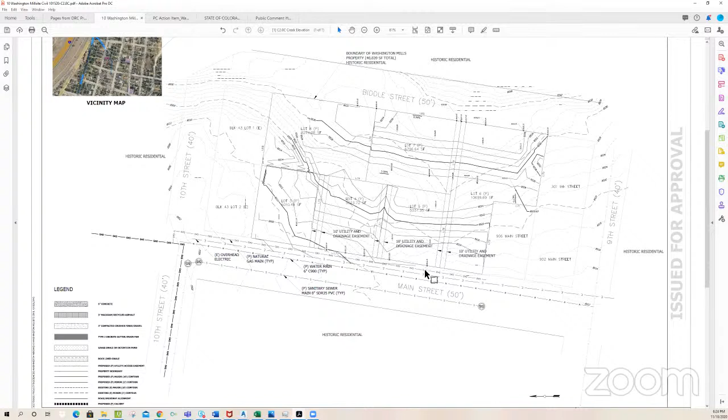You can see we've worked to direct drainage from these upper 3 lots to drainage and utility easements adjacent to lots 3, 4, and 5 along Main Street. This gives us access for water, sewer, electric, gas, and phone utility services, as well as an opportunity to properly drain those upper lots across and down to Main Street, where they currently all drain anyway.

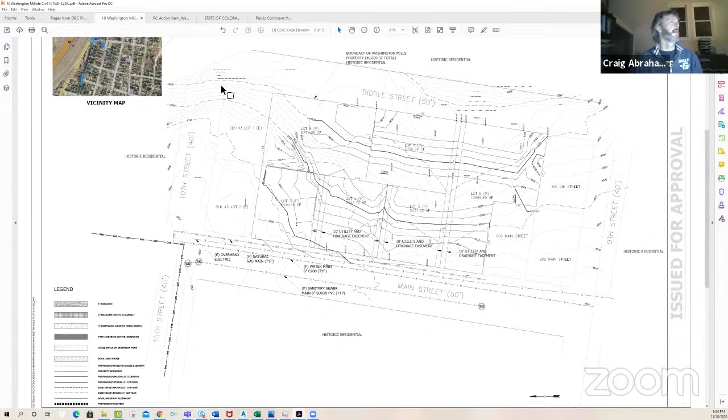We'll zoom in a little bit here to Lot 8, because everybody wants to talk about Lot 8.

So this is the CGS report, or letter I should say, which talks about the apparent tailings on Lot 8. Those tailings exist generally in this area and then in this area as well. The intent would be to construct the residence on the south end of Lot 8 — that would be the building site. We haven't gone out and done a bunch of measurements yet, but that would certainly include an area that has potentially been identified with those tailings.

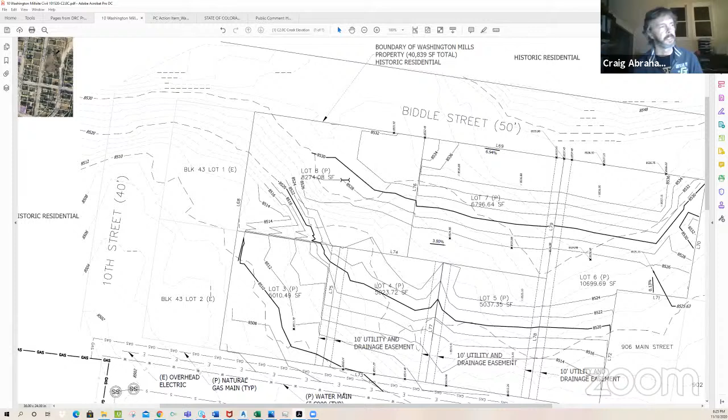We have acted on the request from CGS with regard to soil sampling. Those soil samples were collected last week, and we expect to have the results and perspective from our environmental consultant by the end of this week. Certainly we'll be moving forward next week to begin formulating a plan to address any concerns identified in those sampling results, and then have those as part of our preliminary plat package for Planning Commission.

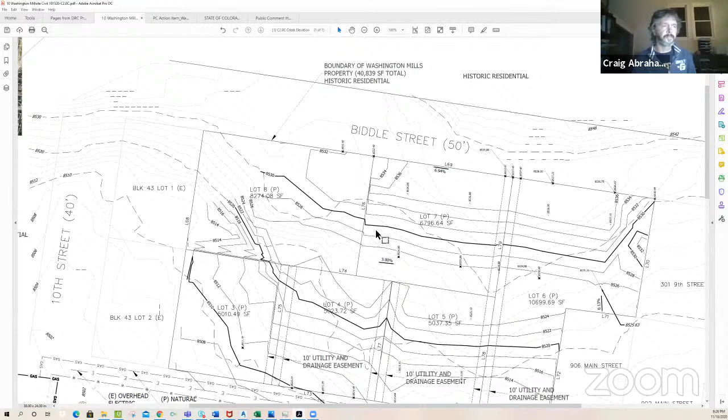What am I missing? Should I open it up for questions here, do you think, Martin, or is there something else I should address?

I think one other item to address would be the request by the Colorado Department of Public Health and Environment. I'm sure Martin's seen this form letter many times already. The entire county of Clear Creek is what's called the Clear Creek Central City Study Area under CERCLA, also known commonly as Superfund. So anytime a referral is sent in Clear Creek County for a land use project like this, the CDPHE — they get them all — they send pretty much the same letter out.

I appreciated that CGS actually came out and visited the site and identified their concerns very specifically. The CDPHE letter really says the same thing in much more generic terms, in my opinion. So we feel like by addressing the CGS concerns, we'll also be addressing the CDPHE concerns as well.

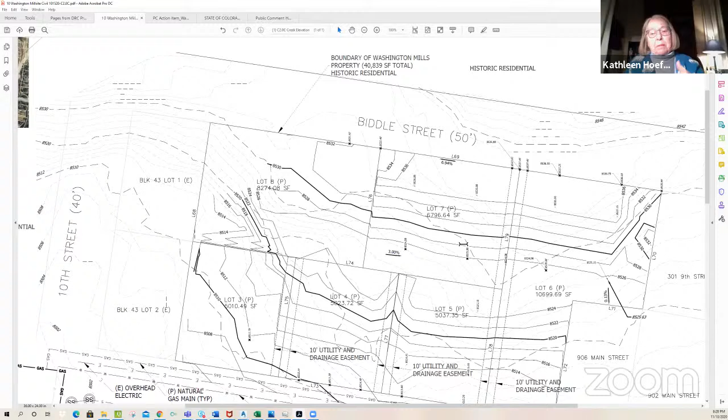Any questions? I have a question, slightly peripheral. Across the street on Main, going down toward Griffith, there are some undeveloped lots that over the years I've been told are really boggy. I just want to make sure that as you bring your water down to Main Street, you don't add to the problem at those sites.

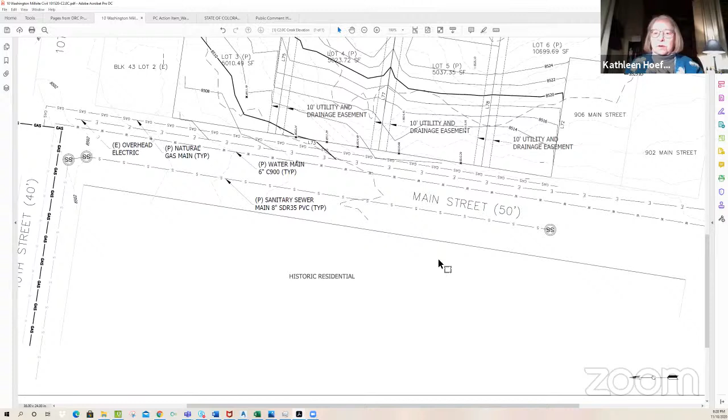Absolutely, and thank you for bringing up those two parcels, because they will also benefit from the infrastructure improvements being proposed here. Those parcels sit right in here, and at some point someone may be able to take advantage of a reduced cost of providing utilities to that property.

Currently, Main Street has a fairly legitimate crown to it, with drainage directed off to the north and south sides. We would obviously be impacting that with our access to those lots along Main Street, and that would all be addressed at a construction document level, ensuring we maintain proper drainage along that side of Main Street. Okay, I'll make a note of that, Kathy. Thank you.

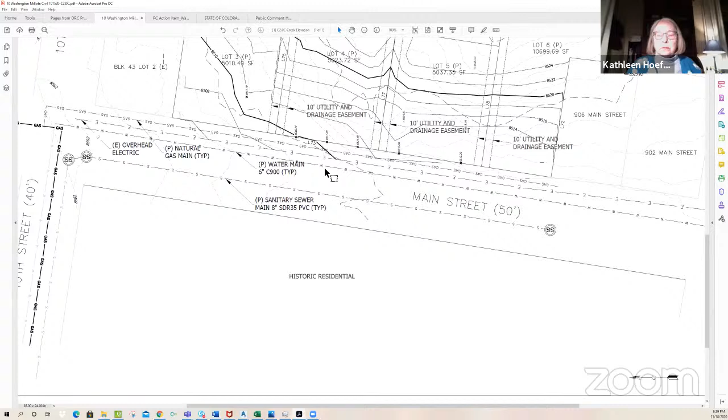Craig, could you comment on the right-of-way for Biddle Street and how it adjusts to the edge of the surveyed properties?

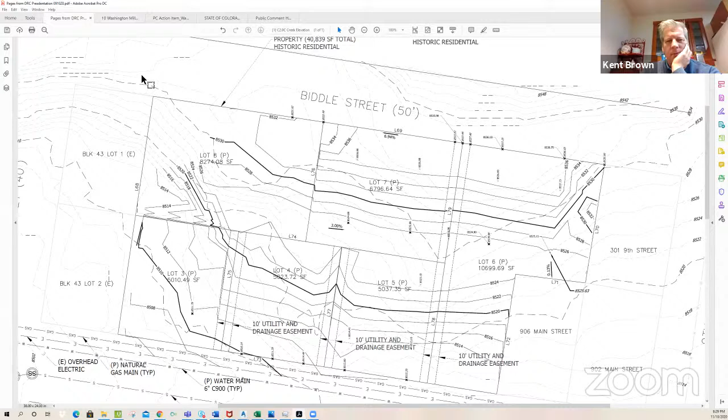We haven't surveyed Biddle as constructed at this point—we surveyed the right of way for Biddle. That's a point that's been brought up by Martin as something that needs to be addressed in the preliminary plat component, and we intend to do that.

This, and I hope you can still see my screen, is the only truly troublesome spot, right here between proposed lot 7 and proposed lot 6. The toe of the slope ekes out right here. You can see that most of the Biddle right of way is in a hillside.

That's an item we'll address thoroughly in the preliminary plat stage. I'm not sure what it's going to look like yet—I haven't had a conversation with Martin about it, and there's probably a conversation with Jerry as well at some point to determine things. I don't think it necessarily impacts construction of the homes on those lots with the existing alignment, but we'll need to take a closer look and hopefully address that in preliminary.

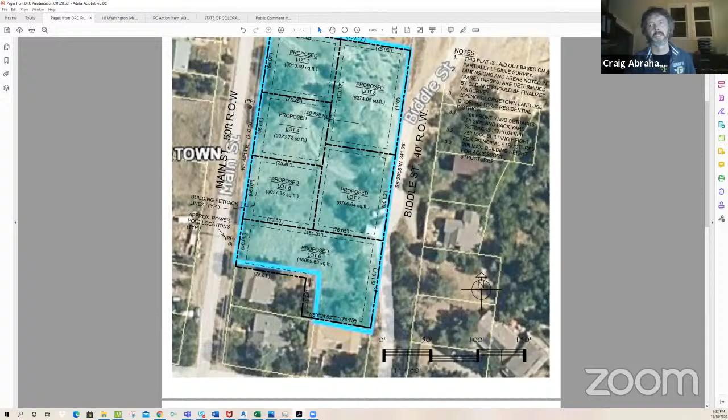This is always a little tricky with a multi-stage process. There's always a desire for more information as questions come up for planning commission and staff, but that's just how the process is laid out—a piecemeal approach, a little here, a little more at preliminary. The bulk of the information will really come at preliminary; there's a lot more detail in that set of documents compared to this stage.

Dwayne, I guess we could go to additional comments if the planning commission members don't have any at this time. Does anybody have additional comments?

Just to state that I'm sorry I'm late, I was stuck in traffic, so I'm here now. Yeah, welcome, man, glad you could make it.

All right, Kent, should we go on to the public hearing part? Are we ready for that? I think so—I think there were a couple of people Jennifer identified who wanted to say something. Yeah, so the meeting's open for them.

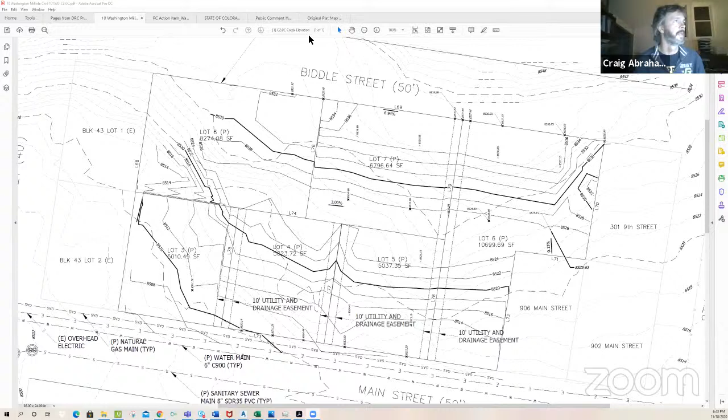Yeah, so I'm going to share my screen again here. I'm sorry, this is probably irritating you guys. I pulled this up as part of Mr. Stavy's comment, but this is the original plat map for the town of Georgetown.

Yes, and this property that I'm trying to circle with my very tiny crosshairs is the Washington Mills property. And the 3 existing lots on the south end were carved out of it over time.

Yes, they were portions of, I believe, block 43. So that's Christie and Matt and Beth. Yeah, it's Christie, Matt and Beth, and then Draxie's house is over here. So over time, those were carved out one at a time is what it appears, which is why the legal description is kind of so wonky.

And you can just barely see, kind of Mr. Stavy's point, this line right here, where it looks like lots 1 and 2 may have existed in the original platting. Yes, it was difficult for me to read as well. You can't really tell which is lot 1 and which is lot 2. No, you can't, but I'm glad I'm not a surveyor for that reason.

I am a surveyor. That's the only reason I was... That was my only question.

Thanks, Chris. And I might add, you mentioned Buckley Geisness. The survey that we had done by Greg Markle when we bought the property originally, our southwest corner stake on Main Street was right inside Draxie Buckley's porch. And we've run into that in some other property. So we voluntarily donated a 5-foot easement along the side of the Draxie house, the Buckley house, to correct whatever it was. We didn't know why our stake was there. I had no interest in going and sipping wine on her porch, so we just donated that amount of property to her.

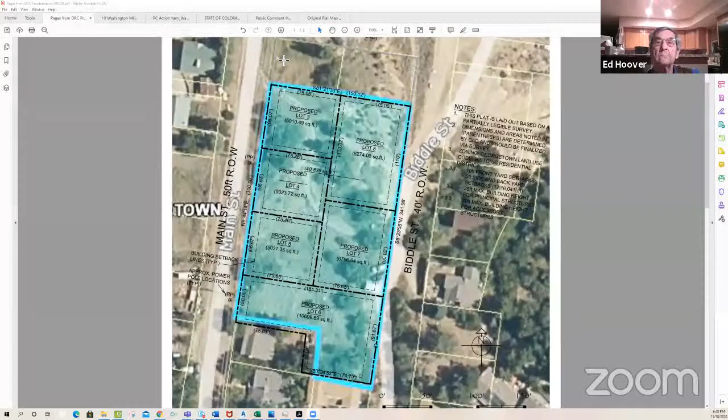All right, Jen, do we have anybody else? The only other thing we had was the written comments from Kathy Hunanen, which I sent to you all. I don't know if Dwayne, if you want to read those, or put those up here on the screen if you want. Sure. Oh yeah, I had that, but I couldn't get to print.

Yeah, I can kind of summarize. Kathy's an environmental scientist, and she had a couple of questions. What was the historical use of the property? Marv, can you speak to that?

To my understanding, like I said before, the only structure that was on the site is either L-shaped or slightly a T, with the longest part of the property running north to south. Roughly in the very middle of the property, the back door, what we think was the kitchen, would have been very close to the Morel house. There was an area that projected out to Main Street that appeared to have a street level door entrance, and then a peaked roof with a second floor facing Main Street. I don't have proof of this, but what I have been told was that it was basically a place where miners might have stayed, and they certainly ate there in the kitchen.